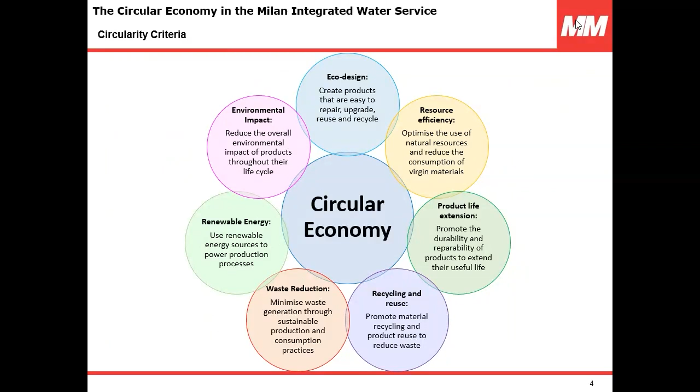I reported 7 pillars that we are engaged in that are really linked with our policy of circular economy, and we will find them mentioned in the next interventions that I will explain to you. First of all, I will speak of DSS energy. DSS is one of the ancestors of AI. We started with this project some years ago. They are twins, the energy one and the pressure one.

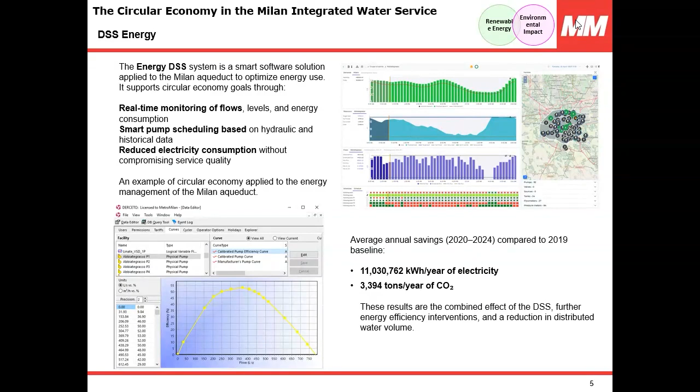The energy one lets us reduce the usage of energy. How? Every 50 minutes, the system, an algorithm, tells us what is the best condition of the network in front of the consumption of the customer, and so we can calibrate all our pumping stations in the network. We have more than 33 big pumping stations, to send more than 200 million cubic meters per year to the city. And so we have a great consumption of energy and CO2 every year.

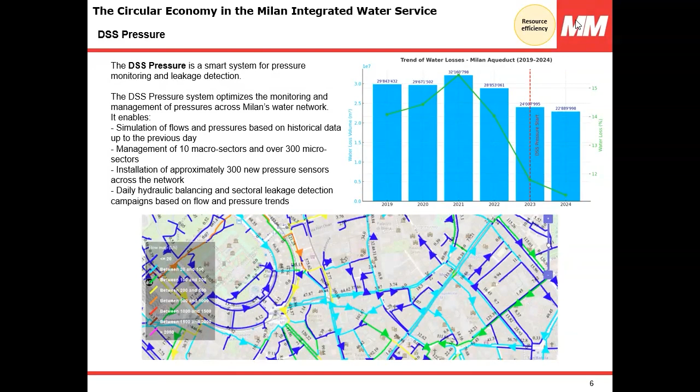At the same time, with a similar system, decision support system for pressure, we are able to reduce the leakage. You have to know that in Italy, the average percentage of loss in the network is more or less 40%. In Milan, with this system, but with the other interventions that we have in managing the network, we're able to maintain the ratio. Last statistic was 11.2. So we don't waste water.

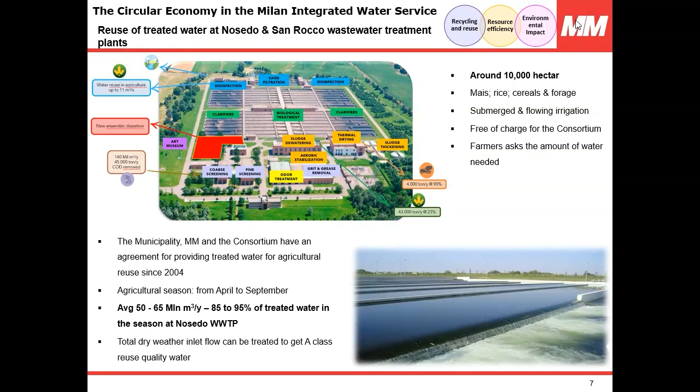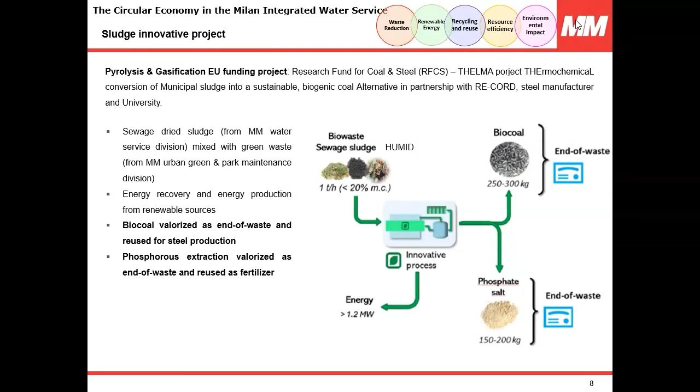From waste, we are engaged in a project with the EU to transform the sewage sludge into end of waste. The end of waste will be a biocoal for steel production, so carbon will go into steel, and to produce salt to fertilize agricultural crops. And this is, I think, a good new project that we are involved in now. I hope to report next year with the progress of the project.

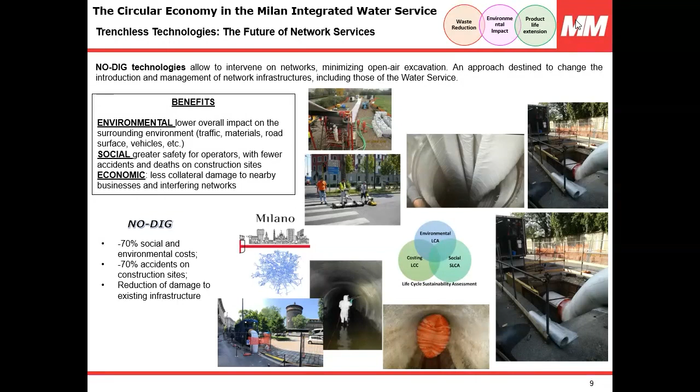On the other hand, when we go in the city and we have some problem with the network, tap water or sewage, usually we don't dig. We use a technique that is called relining, in which we put a sleeve inside the pipe, and then with UV, we vitrify the pipe, so we don't have to dig and extract pipe and give a lot of disturbance to the population. In the last year, I think that we have done it for more than 100 kilometers. That is really important for Milan. You have to know that we have trams, so it's not so simple to substitute pipes in this city.

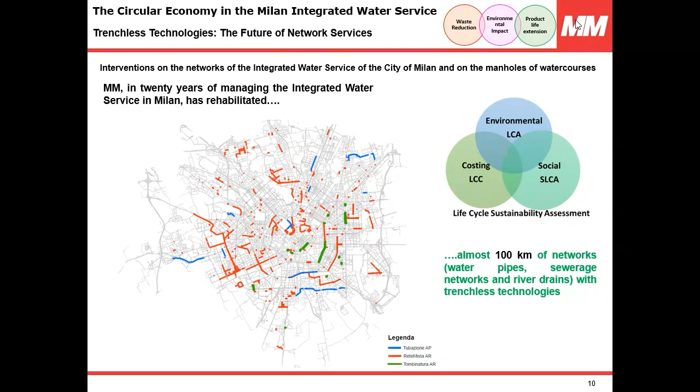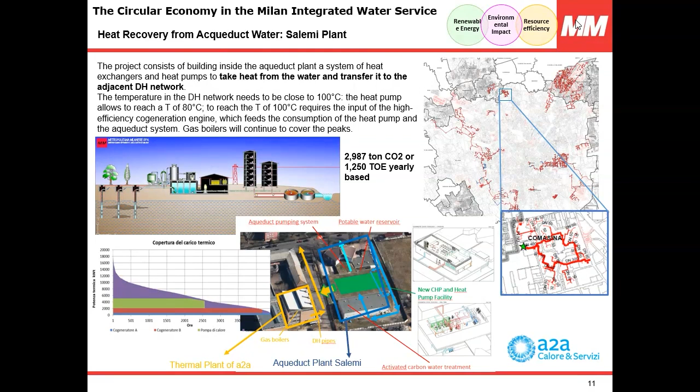3 examples. I explain to you the principle. If we have a temperature in water, in water we have energy, even in sewers, in sludge, but even in water that we give to the population. This is an example of collaboration with A2A, another major firm in Milan, in which from a pumping station, we give to a thermal plant that they use for district heating in Milan. We take the energy from water, with a heat pump station in between the pumping water station and the thermal station, and we are able to reduce the use of methane in the thermal station of A2A, because they take energy from our water.

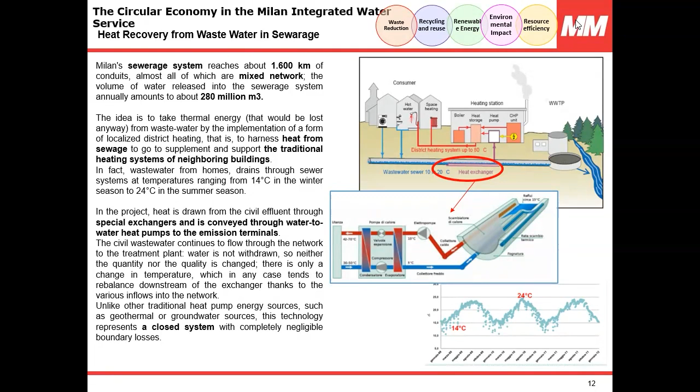The same we are trying to do in our sewers. This is a heat exchanger. We take from the sewer under the building the energy to transfer to the building, to avoid using methane even in this case. And this is a great occasion for us in Milan, because we have the maintenance of a lot of public buildings. So for us, it's an occasion to combine this.

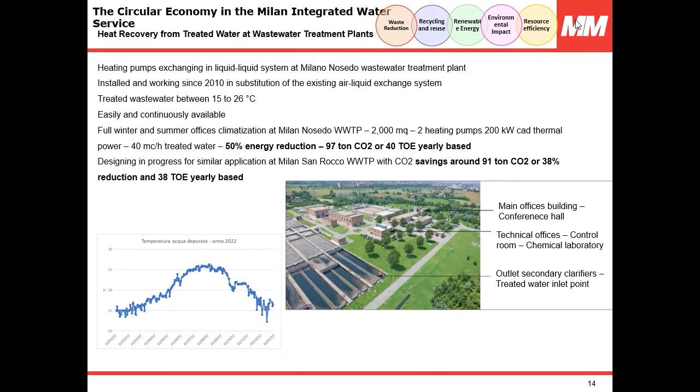This is another example of the same technique that we were adopting. In our Nosedo plant, we have done it at industrial scale. We do this so we don't waste energy, but we give energy to the employee building. We have a lot of buildings for our employees, and so we save a lot of energy year by year with this technique.

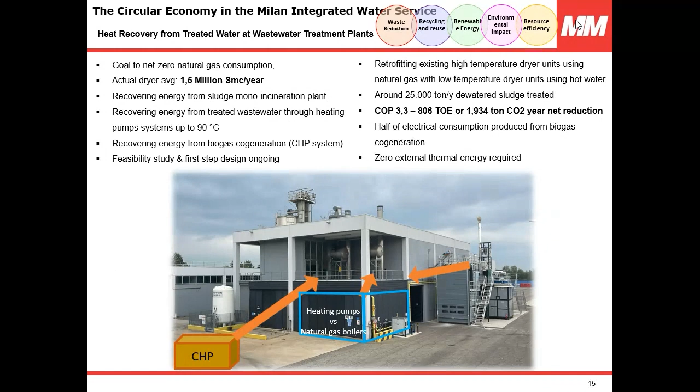We are changing even our way of using energy. We are passing from high temperature dryers. The dryer we use to reduce the volume of sludge. We are implementing a new technology to be more efficient and not waste energy for this. So we are going to low temperature, and this will lead us hopefully to save a lot of energy in our plant, and we will do it even in the other plant that is called San Rocco.

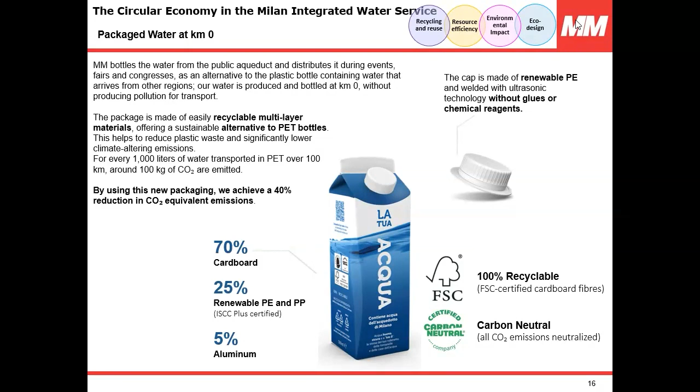Thank you very much, Andrea, for sharing with us your unique perspective on a crucial aspect of the circular economy at the urban level.